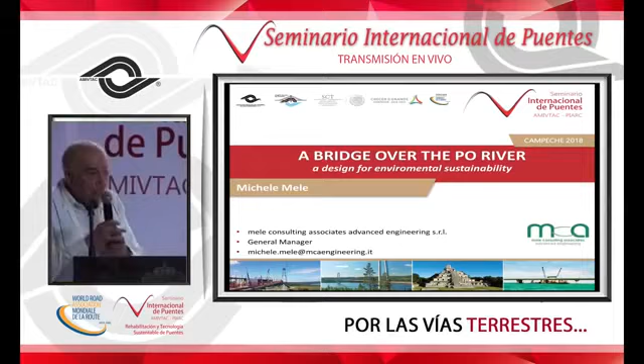The time I have is not so much, so I will only be able to give you some flash information about the design of this bridge.

The title of my presentation is A Sustainable Design for a Bridge over the Po River. The Po River bridge is the largest and longest bridge in Italy.

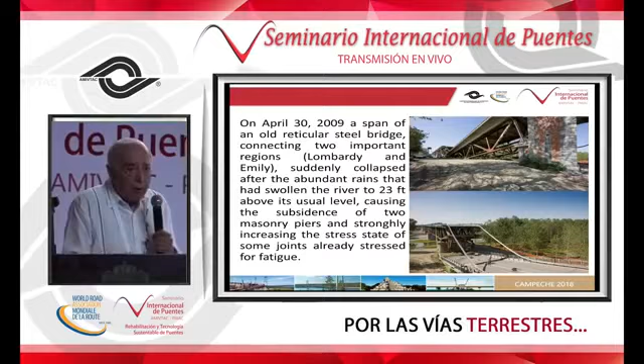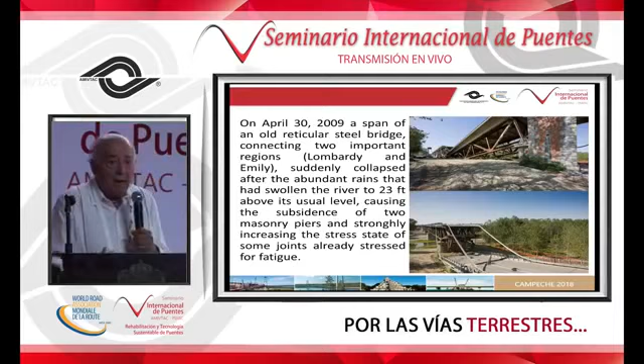What I will say before I start the presentation is that I talk about sustainable design. Be careful, I don't talk about sustainable technologies, because sustainable technologies are only a part of sustainable design. I mean that if we use only sustainable technology in a design, we cannot afford what the environment needs. And to avoid this confusion that now exists in engineering, I think that PIARC is doing very good work in these cycles in the bridge committee. Thank you.

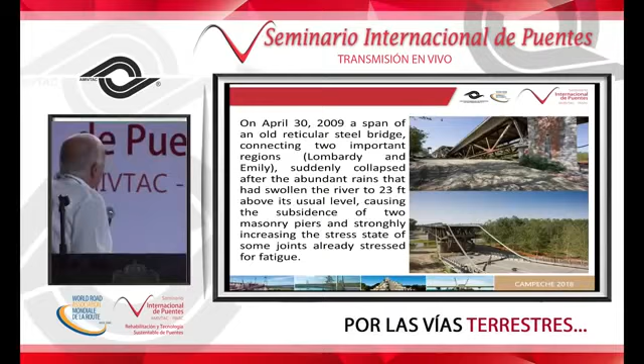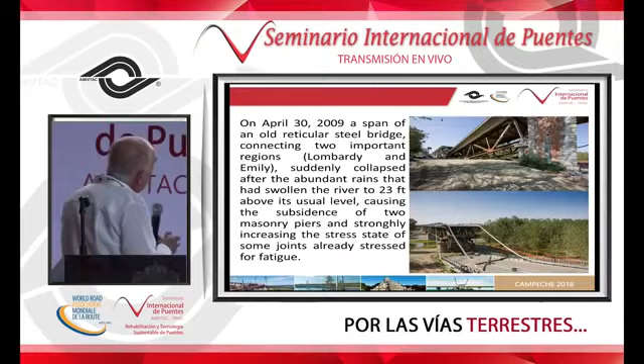On April 30, 2009, a span of an old reticular steel bridge connecting two very important parts of northern Italy, the regions of Lombardy and Emilia, suddenly collapsed after abundant rains that had swollen the river 23 feet above its usual level, causing damage to the masonry piers and strongly increasing the stress state of some joints already stressed by fatigue.

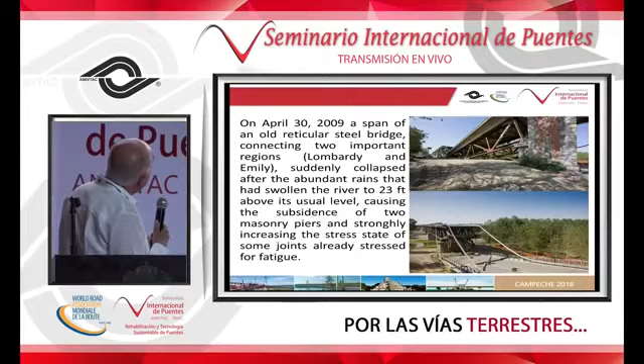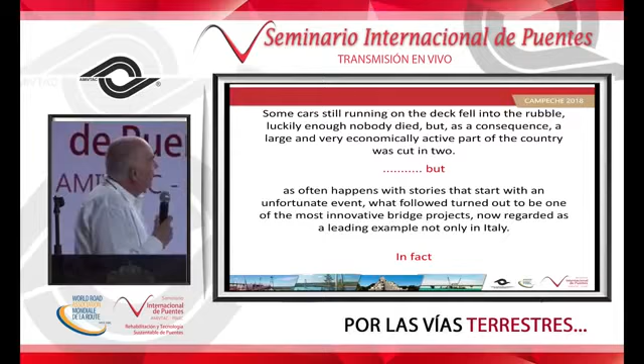Luckily, nobody died, but as a consequence, a large, economically active part of our country was cut in two parts. But, as often happens with stories that start with an unfortunate event, what followed turned out to be one of the most innovative bridge projects, now regarded as a leading example, and not only in Italy.

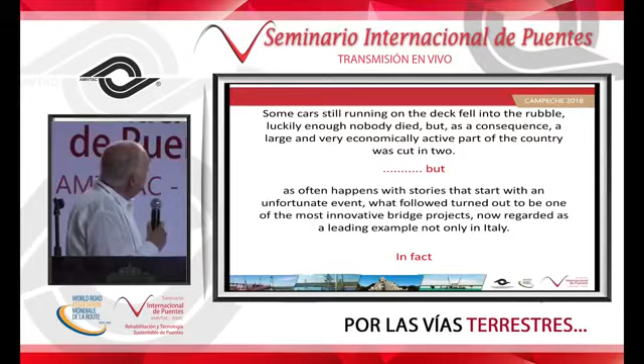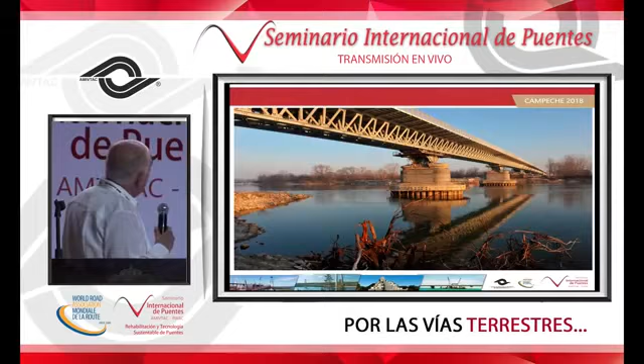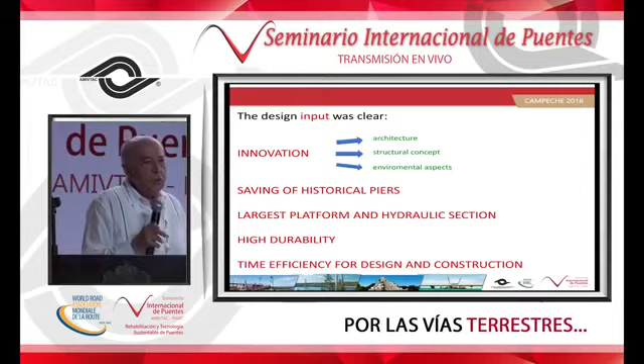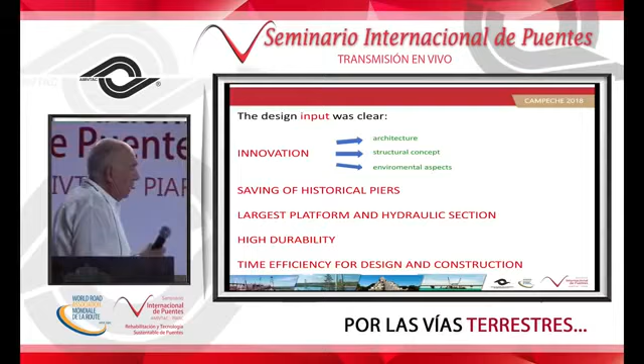What our road administration, named ANAS, decided to do was not repair the old bridge, because it was not good due to fatigue problems. It was very old. They needed a larger platform. They needed better performance for hydraulic problems.

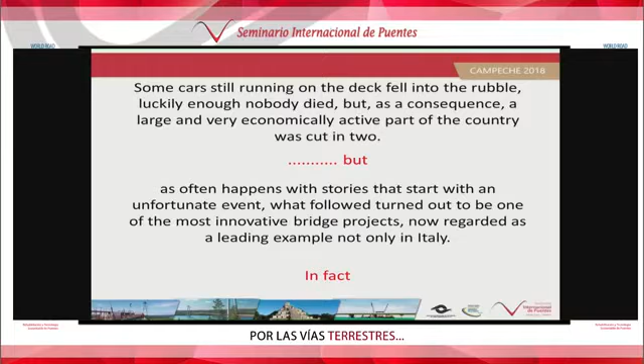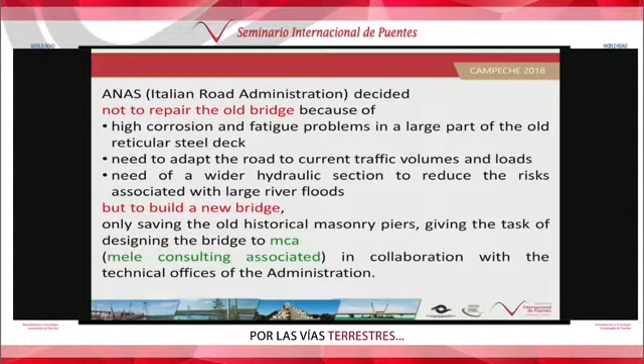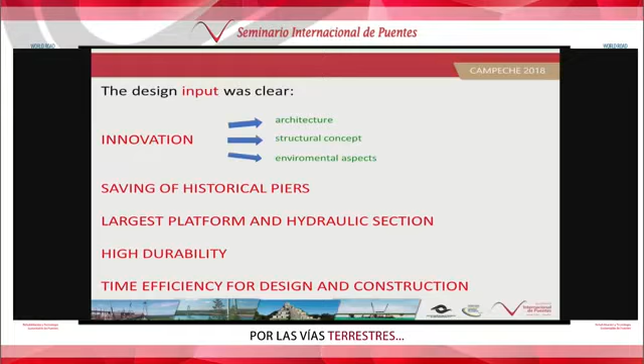So, they decided to build a new bridge, giving the job of this design to my office. The input was very clear: first of all, innovation — innovation in architecture, innovation in structural concept, innovation in environmental aspects. And after saving the historical piers, since we could not do anything with the historical masonry piers, a larger platform and hydraulic section, high durability, and very important, time efficiency for design and construction, in order not to keep these two very important parts of our country cut off. And the output of this input was this bridge that you see in these slides.

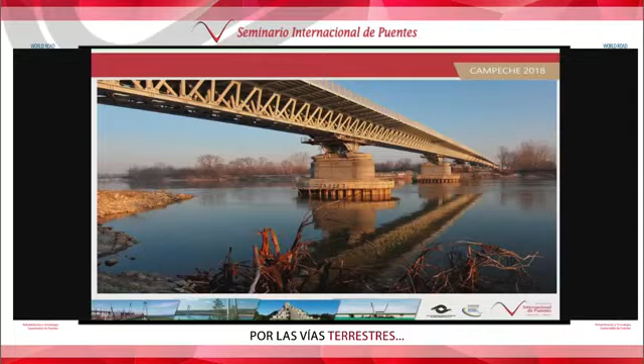About the characteristics of the bridge: 11 spans of about 75 meters for a total length of 800 meters for the bridge over the river. A platform more than 15 meters wide with one sidewalk, one cycle lane, and two traffic lanes, all over an orthotropic steel plate.

The deck is a continuous steel grid truss girder, 4.5 meters high, and on each masonry pier a steel capital 3.5 meters high was placed, rigidly connected to the deck's three-dimensional truss girder. Plus there was a viaduct approach of about 300 meters, but this viaduct approach is normal and is not the subject of this presentation.

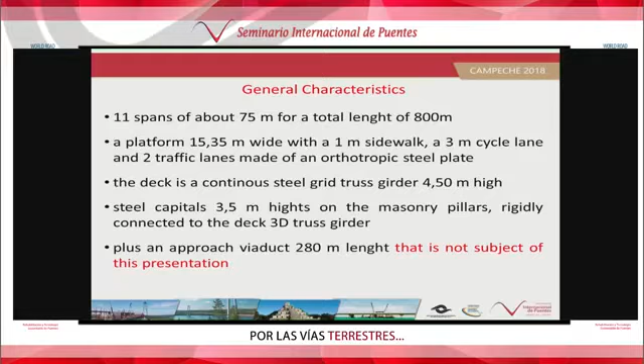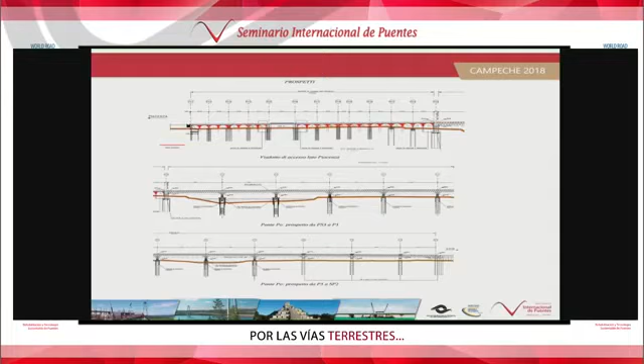You see the viaduct access and the span of the main bridge.

About architecture, the shape of the bridge has sprung from the will to preserve the characteristics of lightness and transparency of the reticular structure of the old bridge. A reticular structure was proposed, but reinterpreted in a modern way with a spatial three-dimensional conception of the lattice, and undoubtedly an original type.

This is an original type for a bridge, with the almost total elimination of bolted joints and the use of tubular profile with a circular section.

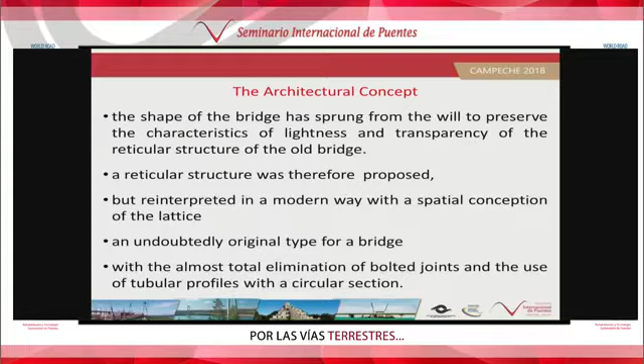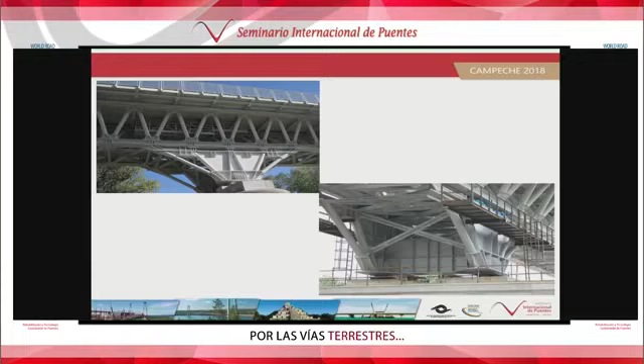About structure, some slides of this three-dimensional grid and capitals. Here they are deformed by the slides.

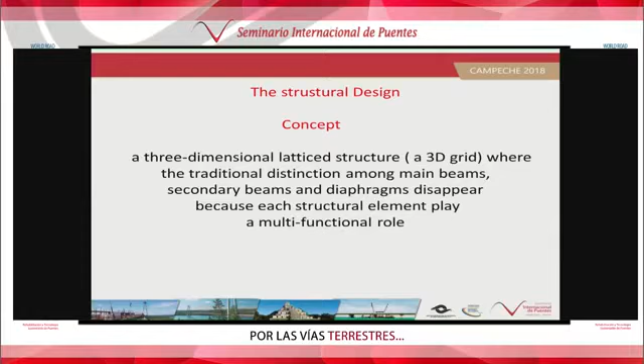The structure was, as I said, a three-dimensional latticed structure where the traditional distinction among main beams, secondary beams, and diaphragm completely disappears, because each structural element plays a multifunctional role. You see some sketches of the three-dimensional structure.

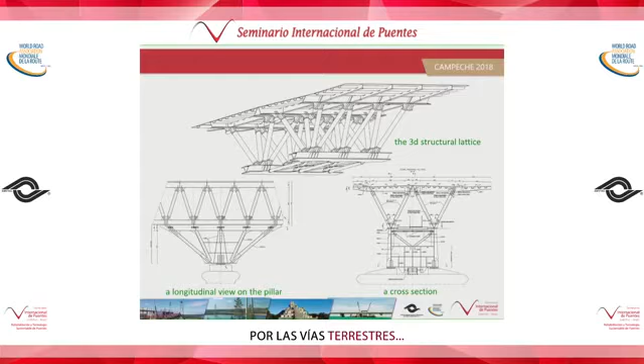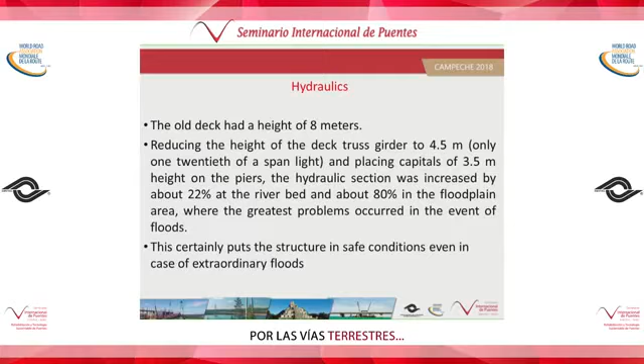About hydraulics, the old deck had a height of 8 meters. With the new bridge reducing the height of the deck truss girder to 4.5 meters, only 1/20 of the span light, and placing capitals of 3.5 meters on the piers, the hydraulic section was increased by more than 20% at the riverbed and about 80% in the floodplain area, where the greatest problem occurred in the event of floods. This certainly puts the structure in a safe condition even in case of extraordinary floods.

The site was seismic, not very strong seismic, but seismic. About seismic resistance, the reference return period was 75 years for the damage limit states and 712 years for the ultimate limit states.

What about seismic forces? The longitudinal ones were greatly reduced thanks to the use of viscoelastic dissipative devices incorporated in the multidirectional bearings, and transferred only to the bridge abutments. The transverse seismic ones were managed in this way.

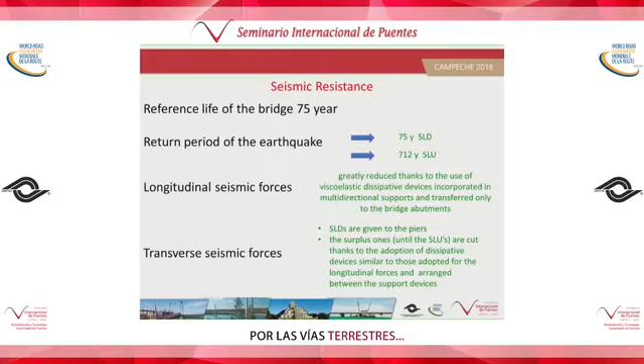For the damage limit states, the forces are given to the piers. The surplus of these transversal forces was cut thanks to the adoption of dissipative devices similar to those adopted for the longitudinal forces, arranged on the piers between the bearings, as you see in this slide.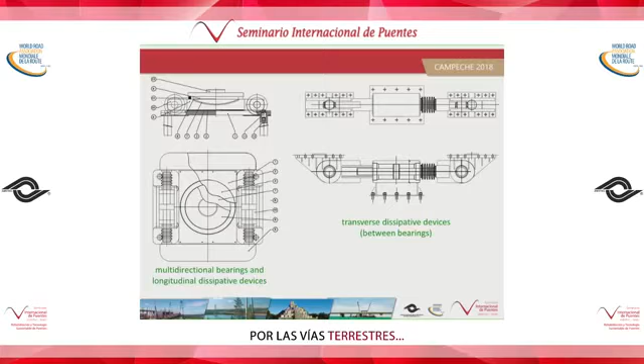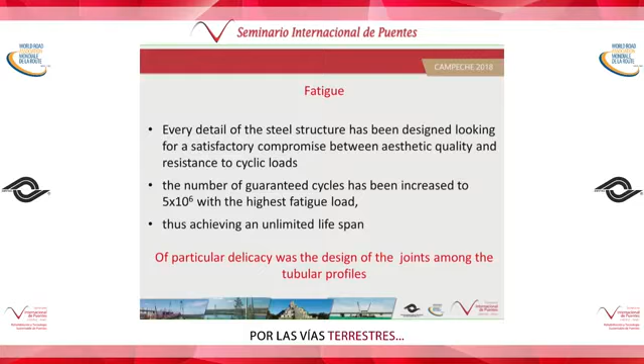About fatigue, every detail of the steel structure has been designed looking for a satisfactory compromise between aesthetical quality and resistance to cyclic loads. The number of warranted cycles has been increased to 5 million with the highest fatigue load, thus achieving practically an unlimited lifespan. Of particular delicacy was the design of the joints among the tubular profiles, obviously.

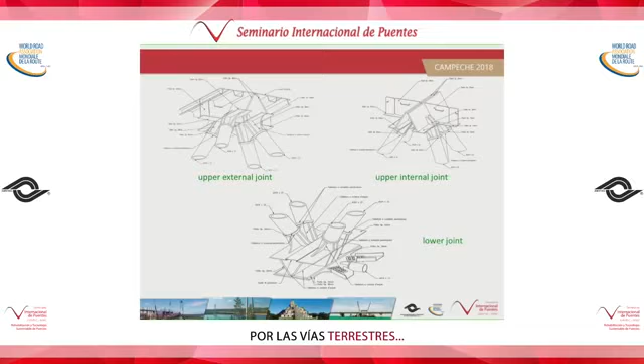These are all kinds of tubular joints. For the lower joints, subjected to the most critical fatigue conditions, 10 different solutions were compared to optimize statical performance and constructive simplicity, analyzing for each one the static resistance, the fatigue resistance, and the deformability in the elastic and elastoplastic fields. At the end, the sixth solution was chosen as having the best compromise.

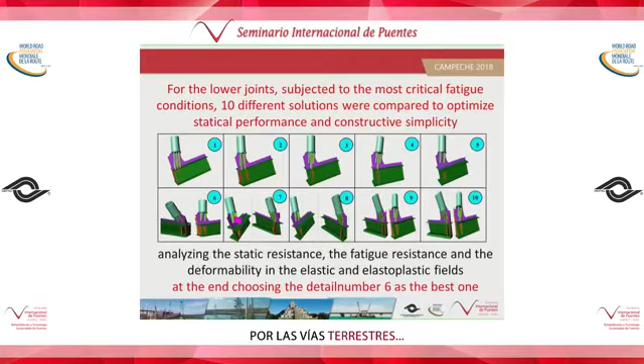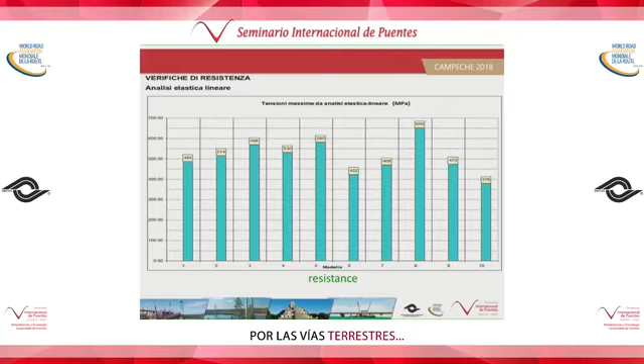What about durability? It has been assured with a typological choice of the steel profiles, avoiding any possible stagnation of water in details.

Adopting perfectly sealed deck joints, adopting welded joints for the primary connections, furthermore with a hot galvanizing treatment for the tubular profiles or closed section elements composed of welded steel plates, with a zinc metallization process for the lower currents at the corresponding joints.

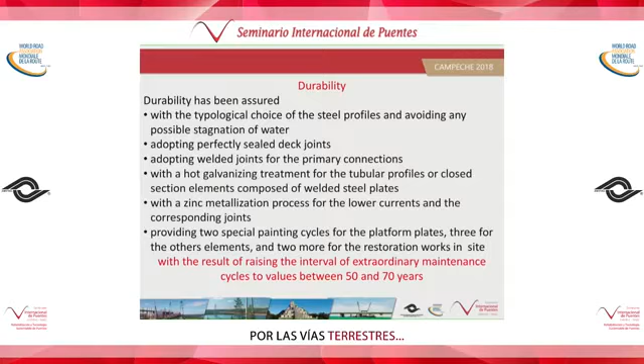The lower joints are the ones more exposed to rain. Providing 2 special painting cycles for the platform plates, 3 for the other elements, and 2 more for the restoration works in site, with the result of raising the interval of extraordinary maintenance cycles to values we could estimate between 50 and 70 years.

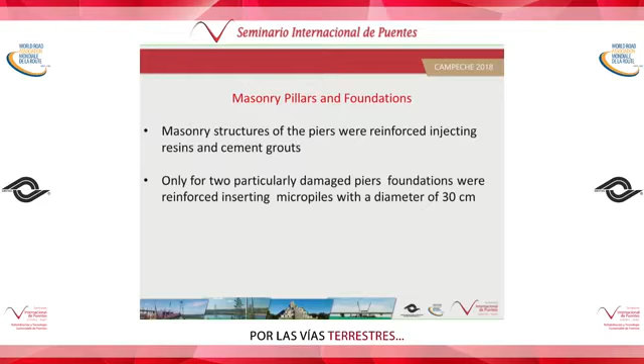The masonry pillars, just a few words: they were reinforced by injecting resins and cement grouts, and only for 2 particularly damaged piers were the foundations reinforced by inserting micropiles with a diameter of 30 centimeters.

Last but not least, environmental sustainability design, and it is for that I present this design in this seminar.

The design solution was compared with two other possible alternatives: first, a steel box deck in ribbed plates; second, a solution similar to the one chosen, but with non-galvanized tubes and traditional painting cycles, comparing both the economic and environmental costs over the entire useful life of the structure.

The economic evaluation conducted with life cycle cost analysis showed substantially comparable results. But the environmental evaluation was not simply qualitative—this is very important—not, as we say normally, just 'environmental friendly.'

When we use only sustainable technologies, we made only an environmental friendly design. But we have made another thing: we have made an analytical evaluation. So our way of designing for sustainability was an environmental efficiency analysis.

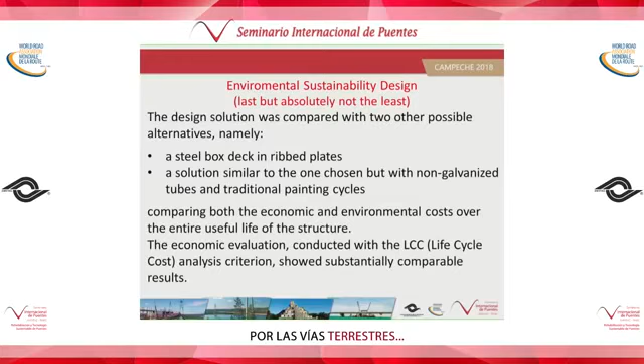The impacts considered were, for simplicity, only those due to the global warming potential (GWP), the accumulation of greenhouse gases in the atmosphere—undoubtedly the most relevant in the construction sector, and in particular for the bridge, both quantitatively and for the induced effects—in comparison with other impacts that we disregarded, such as photochemical ozone creation, potential acidification, and so on.

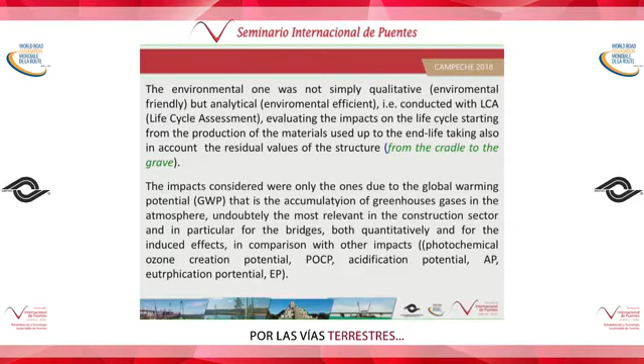So the life cycle analysis evaluated the global warming potential of any substance, material, and technology produced in the process, in terms of an equivalent GWP of carbon dioxide.

At the end, it resulted that the chosen solution had emission values of at least 10% less than the other items compared. But this result was achieved, be careful, neglecting two important factors.

First, the tubes used came from steel scrap. And second, the steel coming from the demolition of the old bridge was largely used—about 40%—for the production of high-quality non-welded tubular profiles used in the construction of the new bridge.

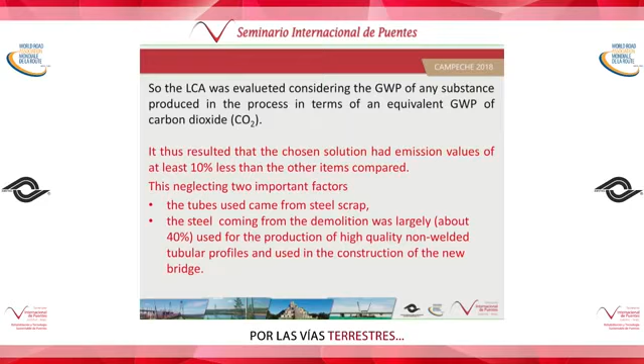Some words about the construction. The project also included the constructive modalities of a large part of the structure, except for the orthotropic panels of the platform and the connecting nodes of the tubulars, creating a real steel workshop in the floodplain area on the right bank of the river.

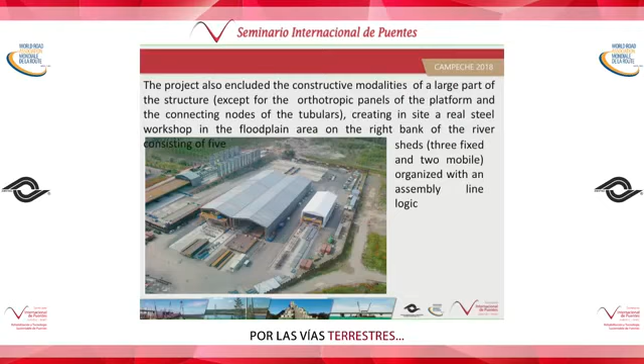The construction was made in 5 sheds, 3 fixed and 2 mobile, organized with an assembly line logic. In the first shed, the reticular web panels were assembled. In the second and third ones, two half-deck spans were assembled together at a time.

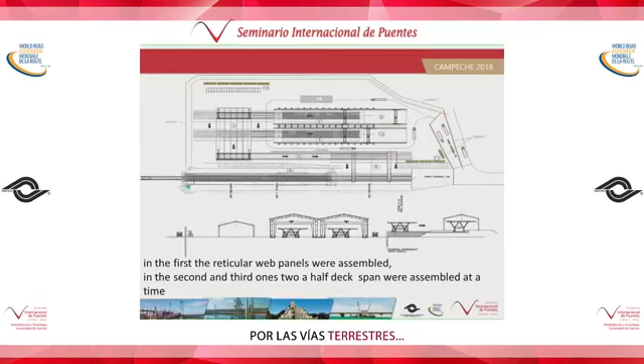Then each one was carried on the elevated launching ramp with a system of rails, and in the 4th shed was joined to the structure already built; in the 5th, metallization and painting were carried out, proceeding finally to the launching on the roller conveyors positioned on the capitals placed over the piers.

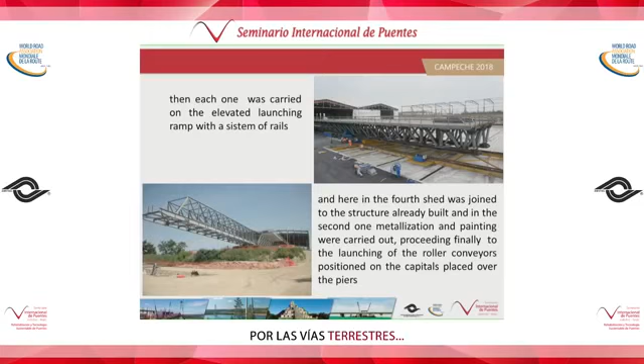Times and costs: 8,000 tons of steel total, including the access viaducts, cost 42 million euros, about 60 million US dollars. Seven months for preliminary and final design to get all approvals, demolition and construction of a temporary floating steel bridge, and 11 months for the bridge construction.

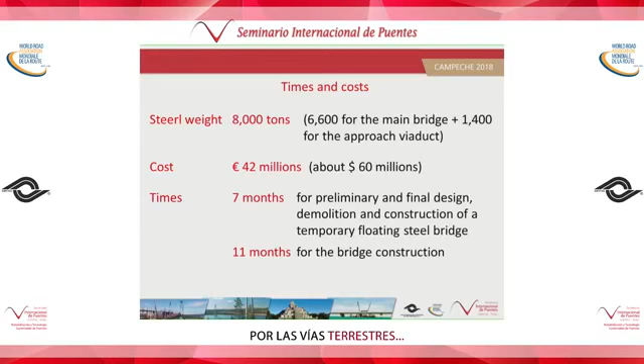And in this way it was possible, with this realization, to celebrate the first 150 years of Italy's unification, lighting this bridge with the three colors of our country and of your country.

Two words to conclude about the awards that this design has obtained. In 2010, the Demolition Award in London. Then the National Geographic Channel decided to make a documentary named Mega Demolition about the demolition.

About the design, it has achieved the Bentley Certificate of Achievement in 2012 for innovation in bridges. And finally, but not least, the bridge has achieved the EPD certificate—the Environmental Product Declaration—and that is the first big infrastructure in the world to have obtained this kind of certificate.